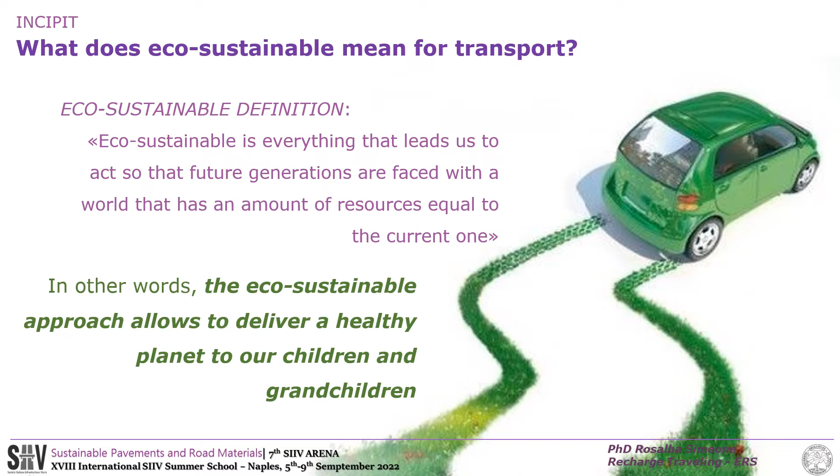The project that will be illustrated deals with the enhancement of transport from the point of view of eco-sustainability. The eco-sustainability definition should be interpreted as the set of approaches to ensure that we leave a healthy planet to our children and grandchildren. That is to say, we don't affect the resources of future generations with our contemporary activities.

The presentation is divided in 7 sections, starting with a brief introduction and then explaining the system and technology that govern the development project, and then allowed for the identification of the individual variables. The identified variables were the protagonists for the first preliminary phase, the experimental phase, in a small-scale laboratory.

Then we will move on to the large-scale design and construction phase, or rather full-scale, in however limited extension. Next, I will describe the operating technology and show the stage that the project has currently reached. Then, finally, we will move on to the conclusion.

As already introduced, climate change is one of the most widely discussed issues. This is cause for concern in scientists about the consequences it will have on nature, humans and animals. One of the main factors of pollution, which has led to the deterioration of the quality of the environment, is the production and emission of CO2. The main defendants have been assessed to be transportation systems operated by combustion engine and by industrial production chain.

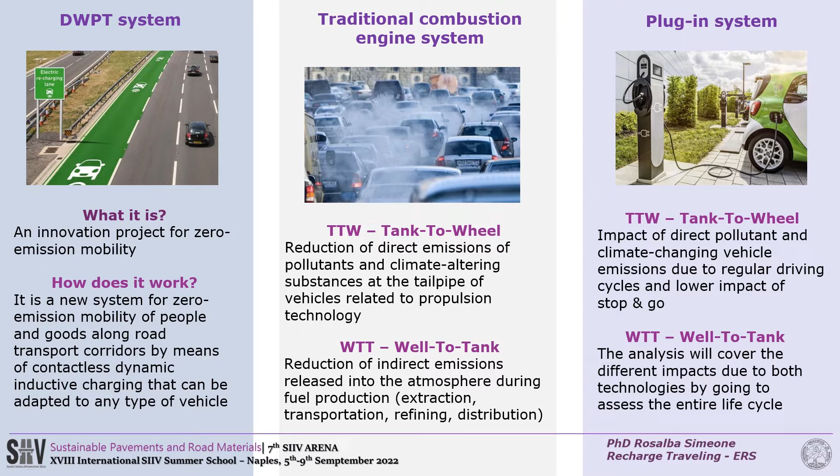The plug-in system, on the other hand, is what we already use. It requires time and a place to stop. Obviously, the direct benefit is travel range, recovery of time and urban space now taken away. Instead, the comparison with the combustion vehicle is definitely the reduction in emissions from both vehicle operation and fuel production.

Another disadvantage of the plug-in system is the lack of approval of the charging device. The device and plug-in footprint vary by vehicle model and country. In addition, the power discontinuity of the power grids in the territory does not allow each site to achieve the same charging speed.

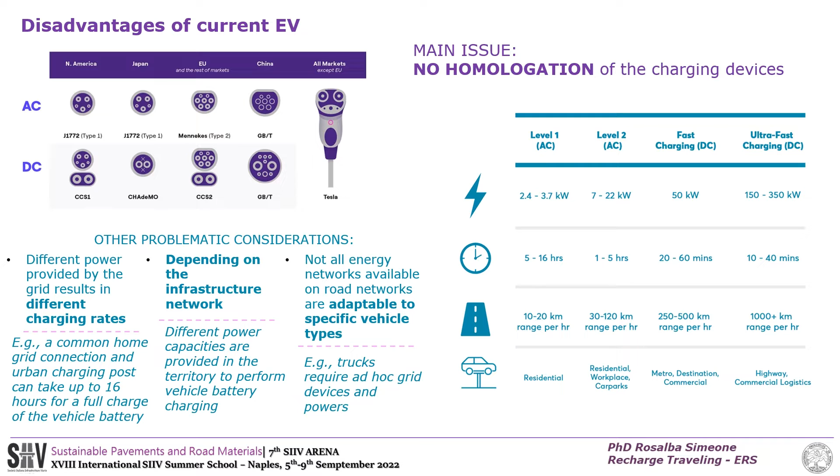Another observation is that depending on the type of vehicle, a specific power is required, and therefore the user is conditioned to plan not only when his long stops will occur, but also where to locate in the territory. At the time when the demand for electricity will grow due to the increased use of electric vehicles by users, the DWPT system is uniquely capable of meeting the energy needs.

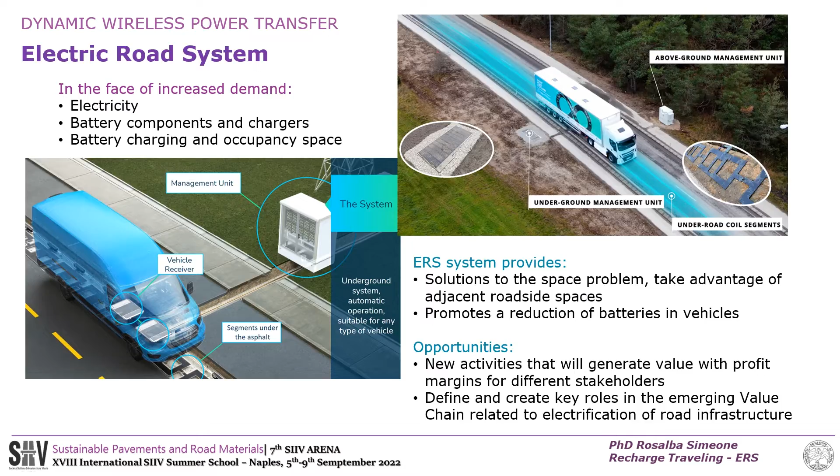The DWPT system is able to adapt to any type of vehicle, so it fully solves the homologation problem and eliminates the problem of time and space that the vehicle needs for charging. The DWPT system is what we consider as hidden infrastructure. We don't see it as it is covered by the pavement.

Its operation is based on the physical principle of the magnetic oscillating field. In fact, we can understand it by taking the example of our rechargeable smartphone with wireless battery charger. How does it work? Both a recharging device, the source, in our case the DWPT system, and the device which must be loaded, possess within them electromagnetic coils.

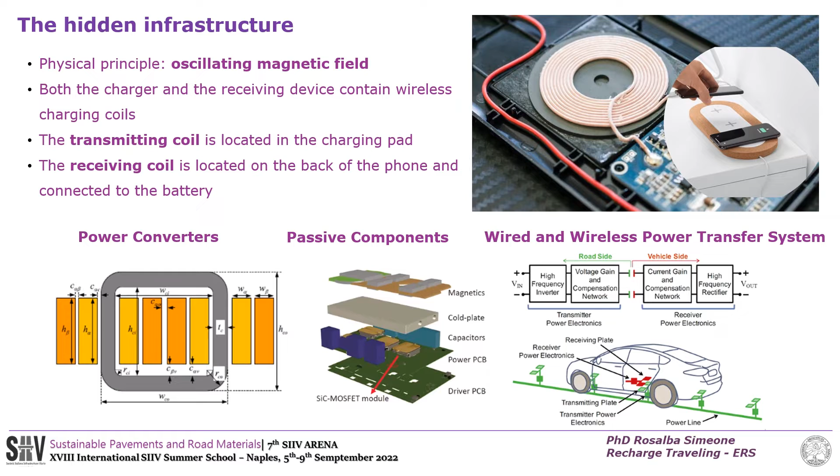Specifically, the DWPT system is composed of energy converters and passive elements, including the magnetic device that communicates with the receiving device, which is precisely the coil contained in the vehicle battery. To summarize quickly, there is a source of electricity that powers the plant. This energy goes through transformers and current converters, and up to here we are in the electrical cabin.

The current passes through the management unit composed of inverters and then travels to the electromagnetic coils that are below the road pavement. The key point becomes the passage of the vehicle over the road. The vehicle contains within its battery an electromagnetic coil that communicates with the DWPT charging system. Briefly, these are the steps by which charging takes place following this innovative methodology.

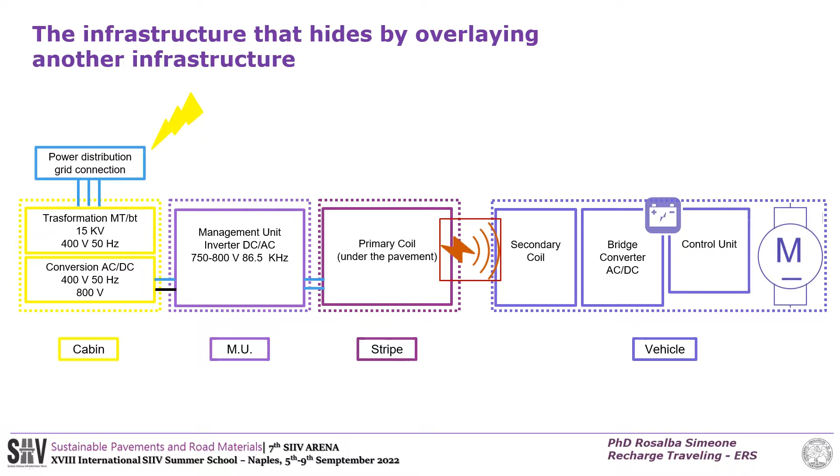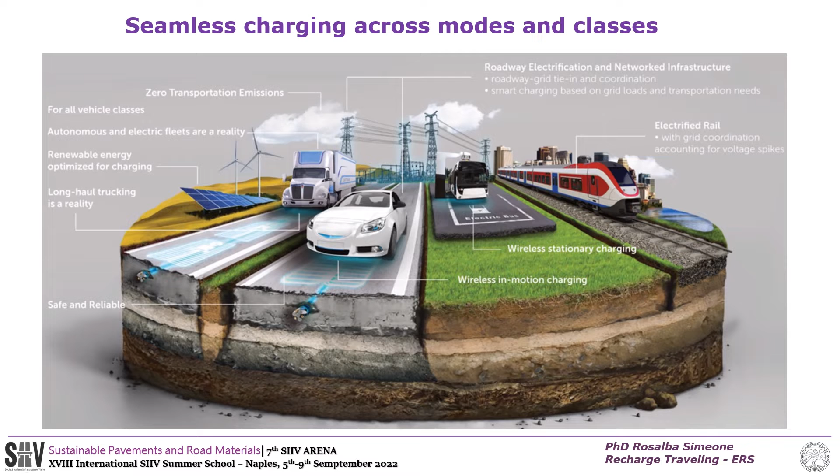This slide is intended to convey that this system is currently being studied for vehicles involving road transport, but may be extendable to any class of transport, such as even trains. The problem will then become finding alternative and environmentally sustainable forms of energy to be able to sustain demand. Before moving on, the construction and the test circuit will be the product of this presentation.

Some basic laboratory experimentation steps were followed. This made it possible to select the materials to field on the circuit. For reasons of trade secrecy on the partners who supply the bitumen additives, it will not be possible to go into much detail. However, a combination of bitumen with innovative additives has been studied to slow down the evaporation caused by the electromagnetic field on the chemical bonds of the bitumen.

The study of bitumen was initially of a chemical type; the spectra of the chemical compounds of bitumen were obtained with the use of Fourier transform infrared spectroscopy. This analysis will be repeated on the bitumen extracted from the core, which will be taken from the circuit every 4 months. Rheological analysis of bitumen was carried out at the stage of unaged bitumen, aged with the RTFOT and PAV methods. Then the fundamental rheological parameters of the complex modulus and the phase angle were obtained.

Subsequently, given a granulometric curve established by the technical specification, the mixtures are made and square-shaped bituminous asphalt plates with a size of 50 centimeters are created. The plates consist of the wear layer and binder. The plates were used to reproduce the conditions that the pavement undergoes when subject to the activity of the electromagnetic field. An electromagnetic field is simulated in the laboratory, and the response is evaluated by applying sensors in several points. Then the materials for the realization of the circuit were selected.

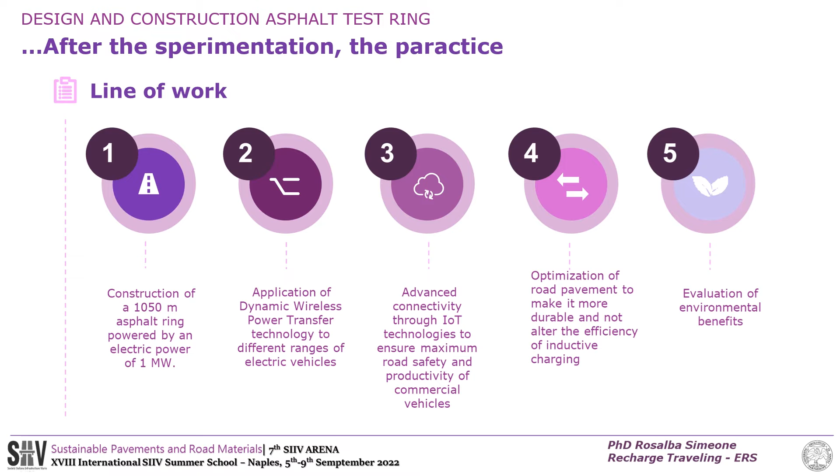Once the experimental part was over, the practical part began, which will follow the workflow indicated by this diagram. The first phase has been completed and concerned the construction of a circuit with a shape similar to an asphalt ring, with a length of 1050 meters and powered by electricity with a power of 1 megawatt. The second stage, which started at the end of June 2022, concerned the application of the DWPT system to various types of vehicle. In future, the data obtained from vehicle traffic will be integrated into points 2, 3 and 4.

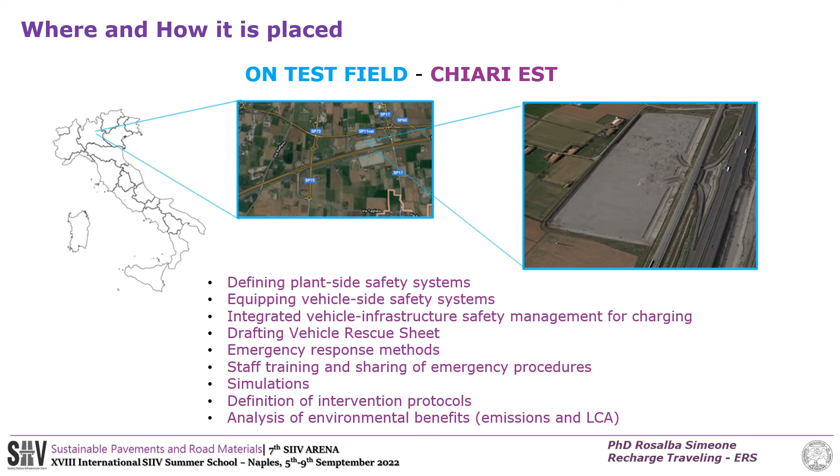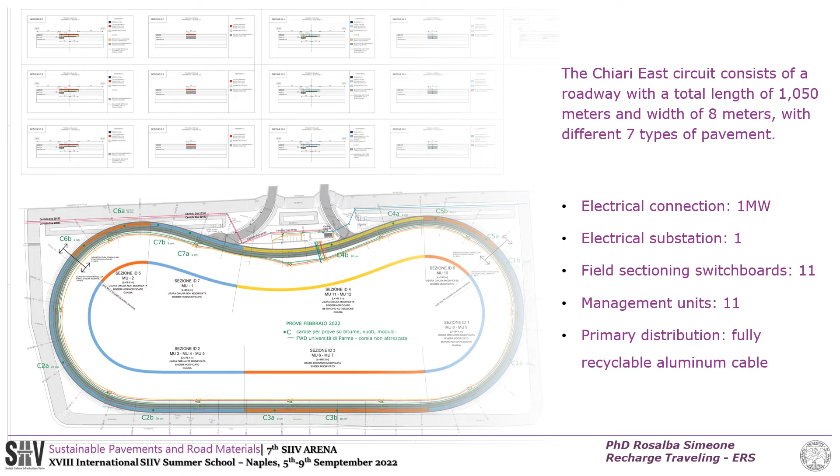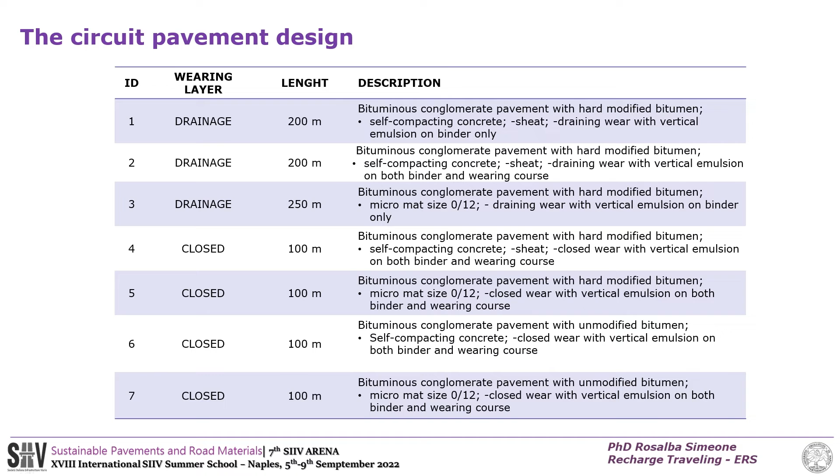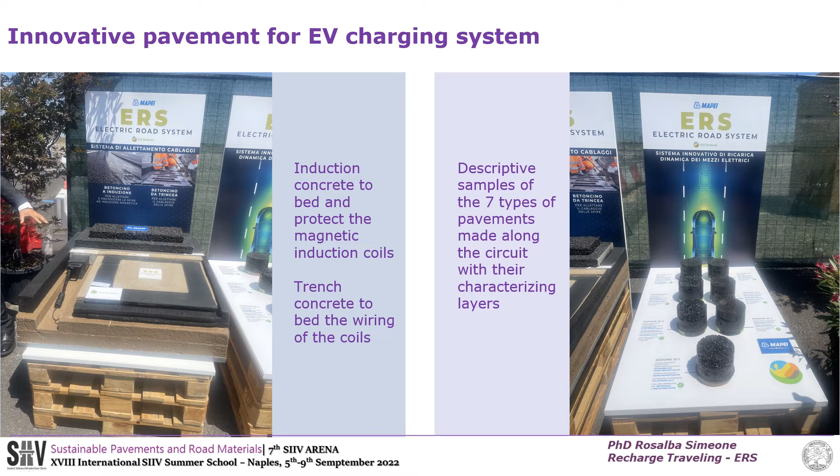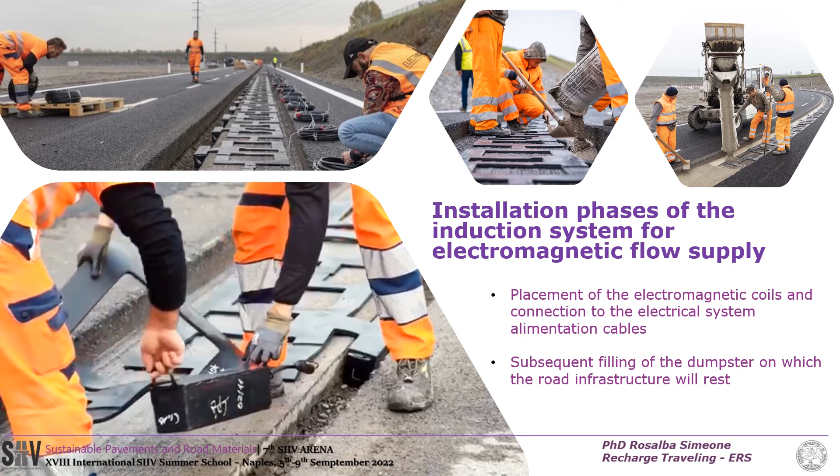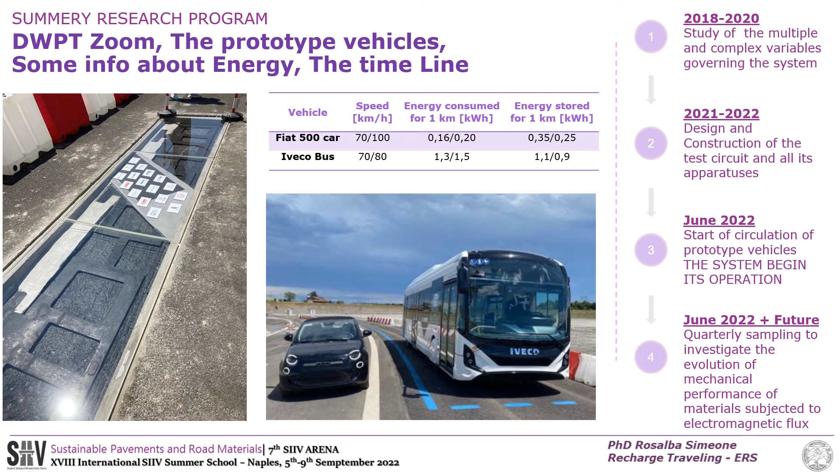To conclude, I present the next goals, which are focused on the quality and resilience of the asphalt mix to electromagnetic flux, and the optimization of all its mechanical characteristics in the perspective of aging. As always, the extension of the service life of a road pavement depends on the ability of the material to withstand the boundary conditions to which it is subjected. But in this case, in addition, it will be particularly necessary to focus on the interaction with the electromagnetic field.

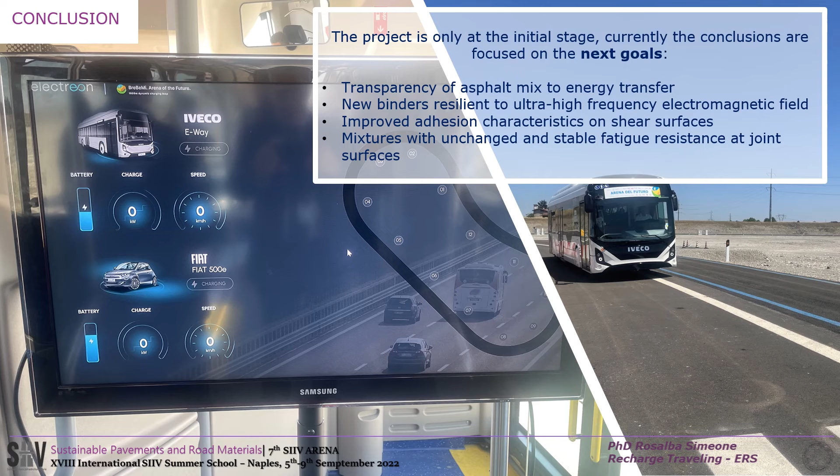I leave you with a video in the hope of having exposed the content as clearly as possible.